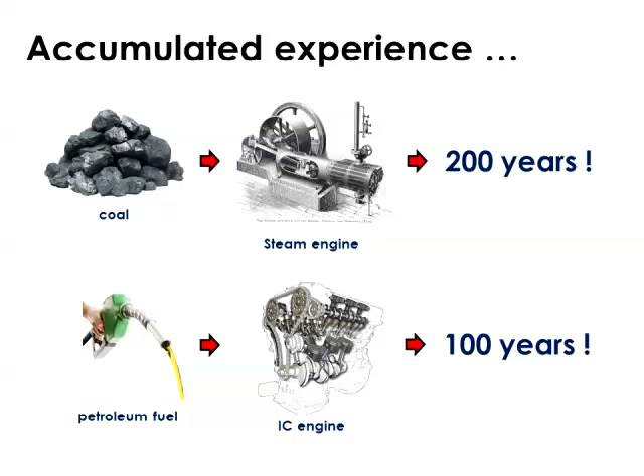So renewable energies have to get into this scenario. First of all, we can say that renewable energies compete with fossil energies. In addition to competing, biofuels also have to comply with engine specifications developed for petroleum fuels applications. When we were developing the engine and the fuel that goes with this engine, both were developed together.

Biofuels have to comply with this. You cannot develop a new type of engine which would be very efficient with this biofuel, bioethanol, for instance. So that's another problem regarding the introduction of bioenergies and in particular biofuels into this scenario.

And of course, when we're talking about bioenergy, biorefining is a key technology. By biorefining I mean the transformation of biomass into biochemical compounds, just as in a petroleum refinery, but also the transformation of this biomass into energy vectors, for instance electricity or biofuel, and also supercritical CO2.

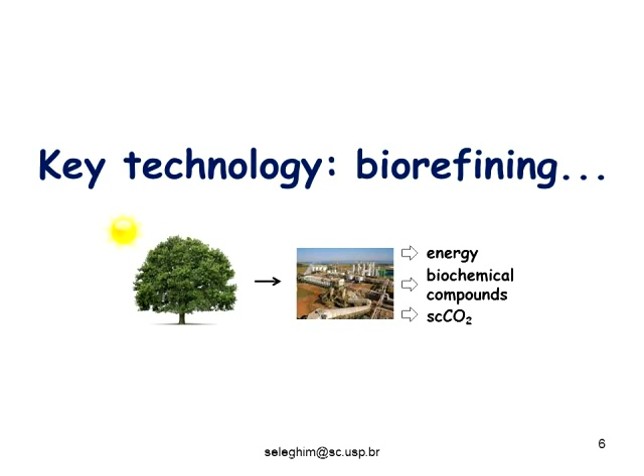That's an idea that I'm just stating. This may become very important in the near future because of carbon capture and storage. Okay, so let's move on.

The basic objective of this work is to investigate and to quantify the impact of integrating new biomass deconstruction technologies into an existing agro-industrial production system in terms of its robustness and new multi-objective optimal operating conditions. So we want to investigate the impacts and how this new integrated system can be optimized and can be operated in a very robust way.

I'm going to define these ideas very precisely during the presentation.

To start this work, we start by defining what we call a reference agro-industrial system. This system is composed of three parts: you have your industrial unit, and you have all the field operations, harvesting and transportation of the biomass to the central unit, central industrial unit. So it's a production, logistics, processing problem.

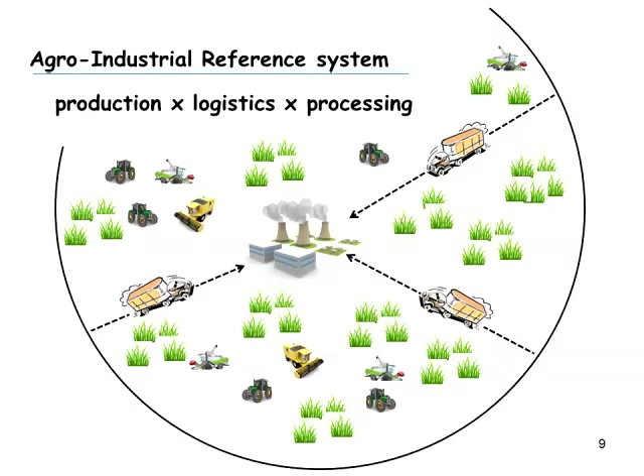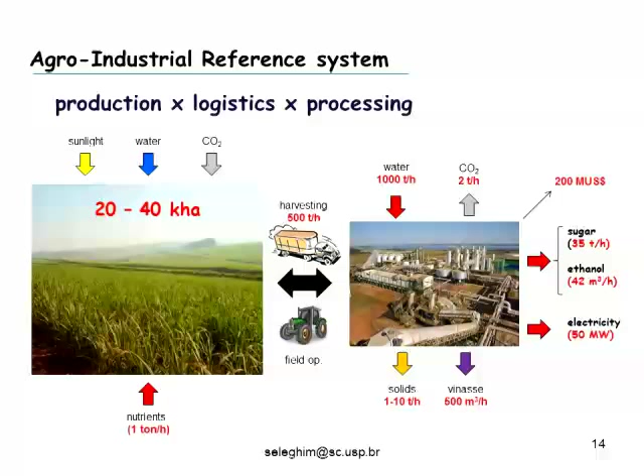Okay, so the problem now is to integrate second generation conversion pathways into these already existing first generation conversion technologies. How can we do that? There are several ways.

A very promising integrating strategy can be summarized in this picture. You see that the idea is to harvest everything together. If you're talking about corn, you harvest corn and also the leaves. You bring all that to your unit, and you perform several mechanical operations aimed to separate, to prepare, and to eventually extract compounds or molecules.

That you can process through a first generation conversion pathway, second generation conversion pathway, or use a thermochemical conversion pathway. I mean, you can burn things to generate heat. The first generation pathway can produce fuel and chemicals. The second generation pathway also gives you fuel and chemicals.

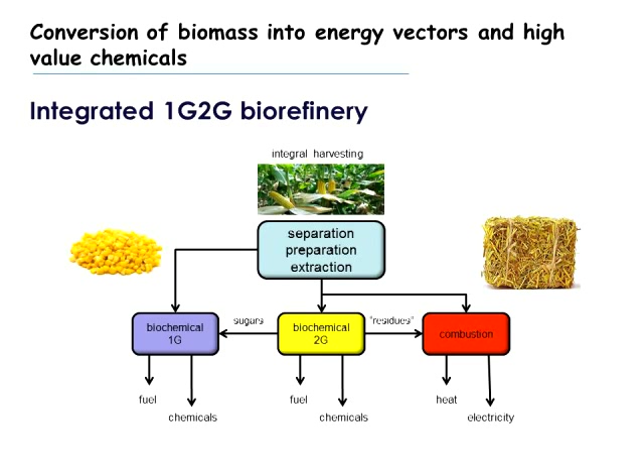And the objective of these processes here is that we ferment, we call the rest residues, you burn them for heat and electricity. So that's an idea of how this could be done, integrating first and second generation together. And you also have one degree of freedom here, which corresponds to deciding the amount to be burned.

Okay, so just to detail a little bit more, this is what happens in a first generation typical sugar mill. You have sugar cane being delivered at the plant, the industrial facility. You have mechanical processing. You separate this to extract those molecules.

That you can send to the first generation conversion pathway, I mean sucrose in the case of sugarcane. And what you cannot, we call bagasse.

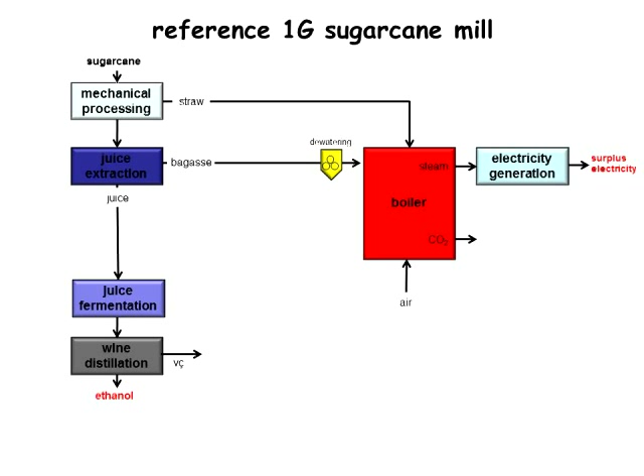Bagasse that we're going to burn has a humidity rate of around 50%. So you produce steam, CO2, and water. This is the conversion pathway for bagasse and straw being burned.

It's dismantled, then you have to depolymerize these large molecules made of glucose monomers, for instance. With those sugars, you can do a little bit more - you can send some of these fermentable sugars or their byproducts to what we call a biorefinery.

And you can produce biochemicals in this enhanced second generation industrial process. That's what I was talking about - going back one slide, you see with this strategy we are producing ethanol, electricity, and chemicals. I forgot to draw the arrow here for chemicals, so you draw the money symbol.

That's an important point. But I want to draw your attention that we're emitting a lot of CO2 here. This CO2 generates revenue, I mean carbon credits.

If you employ another type of technology instead of using air - I think in the near future this is going to be a very important idea, because fossil fuels are coming back very strong, especially because of new sources that weren't known before but are now viable due to new technologies. I'm talking about shale oil and gas.

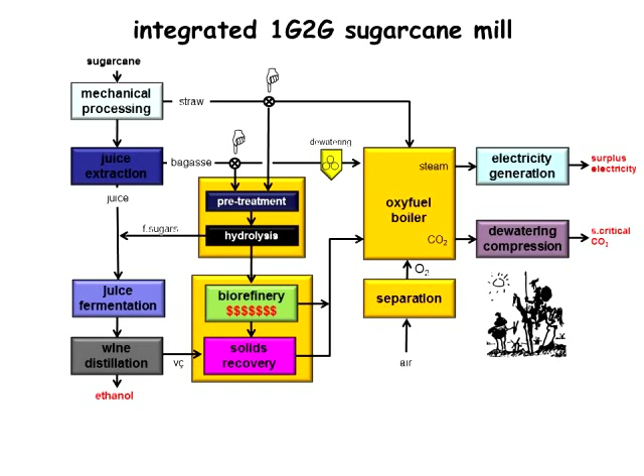So let's move on because I don't have all that time. Now I'm talking about modeling. We have this reference sugarcane unit. We already defined the scales that we have to work around, and now I have to describe how we're going to model this process.

The inputs, we can think of two types: process variables and control variables. Process variables can be fiber content of biomass, humidity, ambient temperature, for instance - these are variables that I cannot control. On the other hand, control variables are exactly those variables that I can or want to control. For instance, the combustion temperature in the boiler - I can control that.

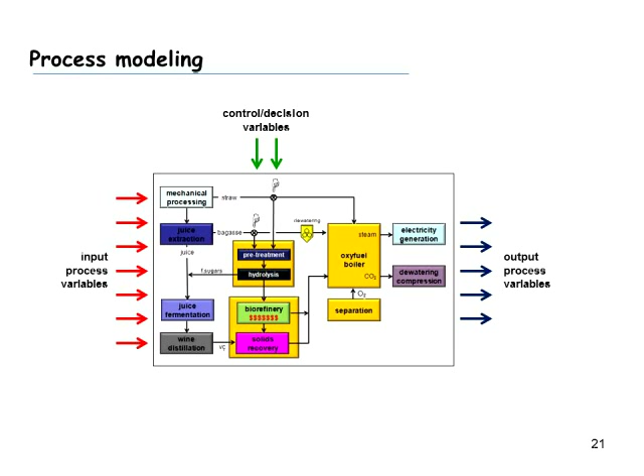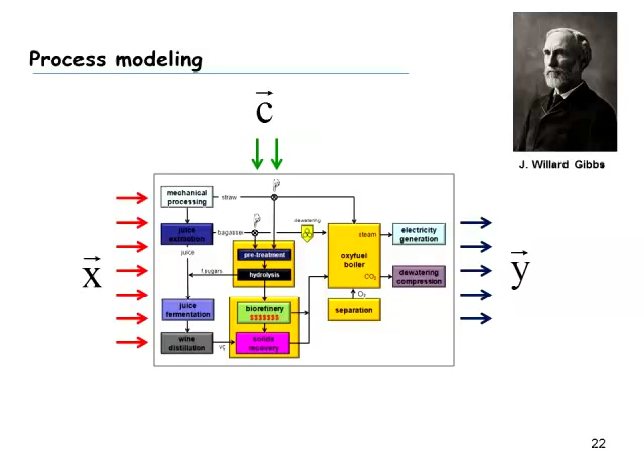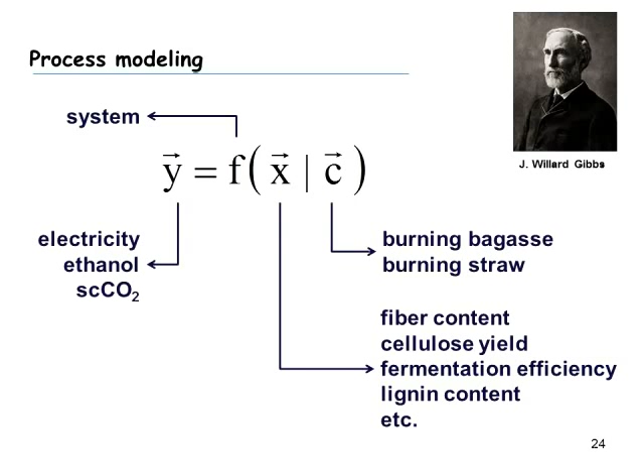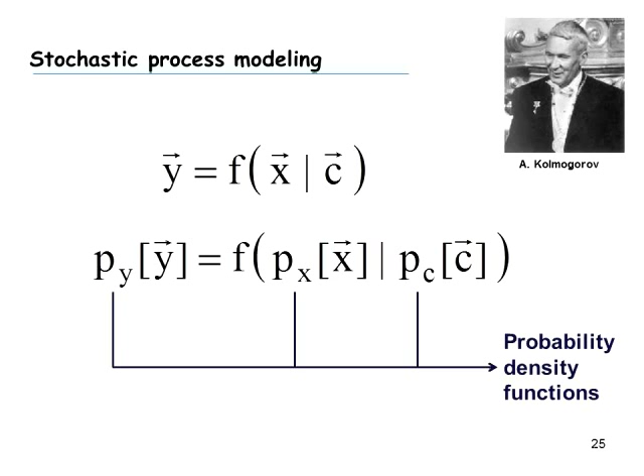It's our input vector here, 14 input variables, and so on. Our control variables - in this first study we're considering that all straw, 100% of straw, is burned. So we're going to control the amount of burning bagasse and the amount of hydrolyzed bagasse, and we have a second control variable, the input biomass, which represents the average sugarcane mill.

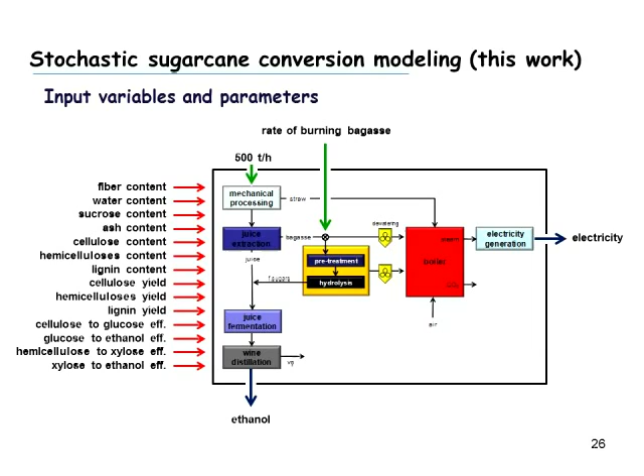So that's our system - this is what we're doing. We're working in terms of probability density functions, these variables that are shown. Let's see the results. First of all, let's see how things are being varied.

First generation ethanol comes from juice, which is converted 100% through the first generation pathway. The amount of electricity generated from burning straw is also fixed, because we're not deciding whether to hydrolyze it or not. So these two parameters are actually baselines of our production outputs.

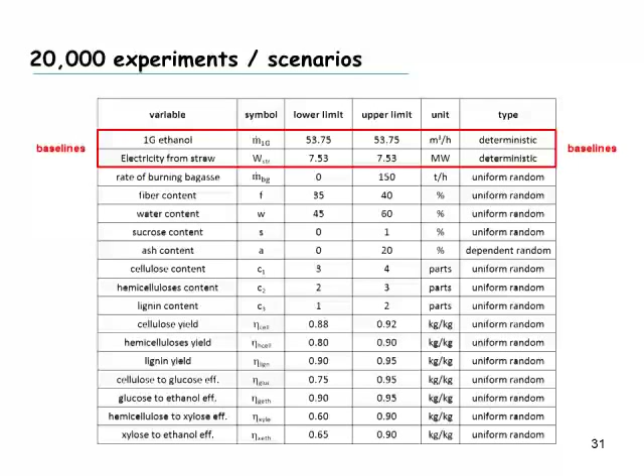I'm going to show you this in a few seconds in a graph. The other variables are being varied: rate of burning bagasse, fiber content, water content, and so on. In this table you have the lower and upper limits, and the nature of these variables. Let's look, for instance, at fiber content.

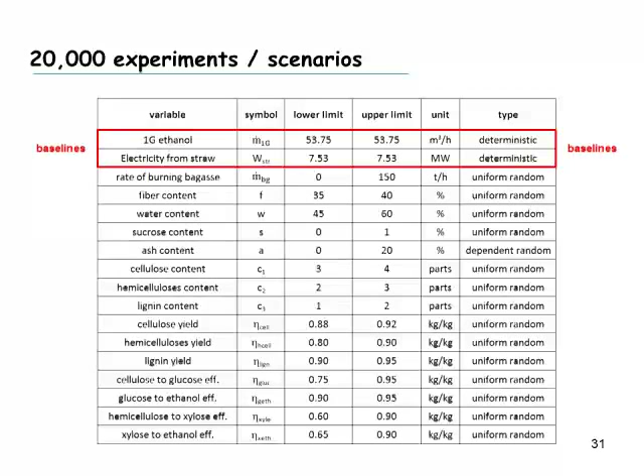Fiber content varies between 35% and 40%, and it's considered to be uniform random. Why random? Because we cannot control it. But why uniform? We are considering a uniform variation of the fiber content because I cannot control it, so a uniform variation is the worst thing that can happen regarding the conversion process, since the fiber content varies randomly, uniformly between 35 and 40%. This is a kind of worst case scenario.

Yeah, that's it, let's move on. Just to show you, I need to explain how the results can be plotted into what we call an operating envelope. An operating envelope is a graph in which you have all your output variables defined, such as ethanol production baseline - that's the minimum amount of ethanol that I'm producing.

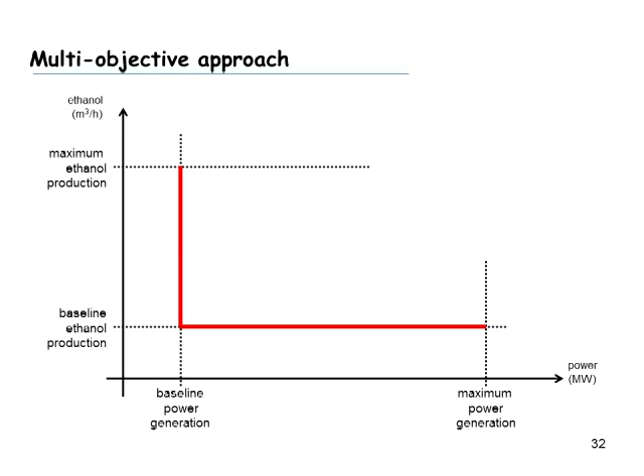This is associated with fermentation of sucrose, which is not varying. Also, you have a minimum electricity production, or baseline power generation, associated with burning straw - the decision of burning 100% of straw. Now you have another curve here, which we call the Pareto frontier, but it's actually an energy conservation limit, because those two variables, electricity and ethanol, are energy variables, and they cannot exceed the amount of energy entering the system. So you have a limit to the right of these baselines.

Somewhere you're going to have an energy limit which is associated with the Pareto frontier. Pareto was an economist, but his ideas are very useful in terms of how to interpret these results.

Another point is that these curves are the baselines in the Pareto frontier. A single set of inputs will produce a single set of outputs, which can be represented as a point in this graph.

Also important, that's the operating envelope. And another important feature to understand the results is what we call the target operating region.

The Pareto frontier actually represents the maximum amount of output variables that you can get. It's constituted of points we call non-dominant points, meaning you cannot increase power generation without decreasing ethanol production. That happens only on the Pareto frontier—those are what we call non-dominant points.

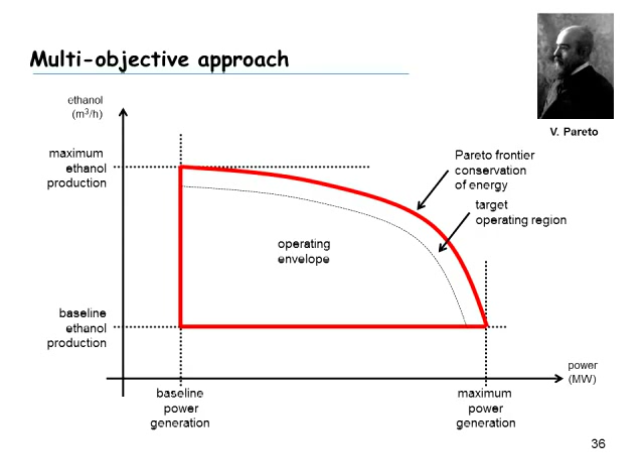From the process point of view, if we manage to operate near the Pareto frontier, this is very nice because this is the optimum operation state regarding this two-objective optimization problem. So let's move on.

Those are the results that we got. So what we did, we wrote all those equations, varied all those input variables, and made 20,000 numerical experiments. Each point is a set of input variables, and we can use formulas for this. First of all,

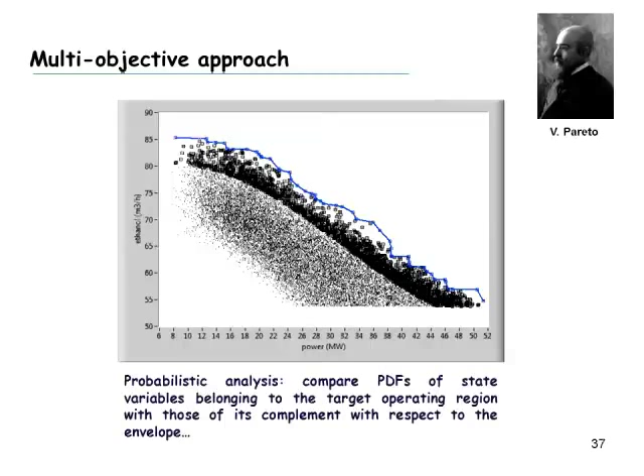let's identify the things I was talking about. This is identified with respect to belonging or not to the target operating region, despite random variations of fiber content, bagasse, humidity, and so on. So if you manage to set your control variables so that you get PDFs which are insensitive, you have a very robust process—because no matter the fiber content, the probability of being near the Pareto frontier is the same.

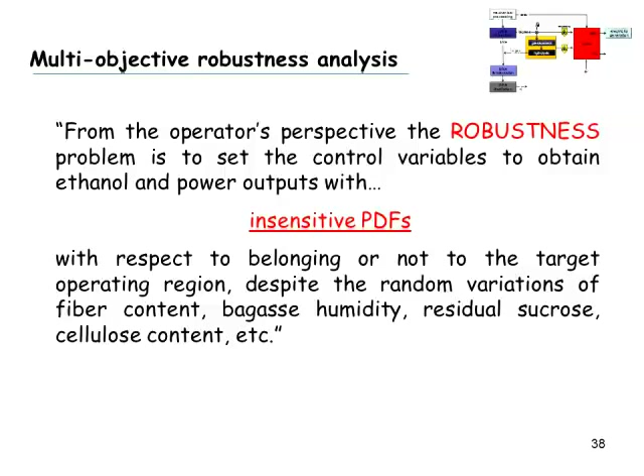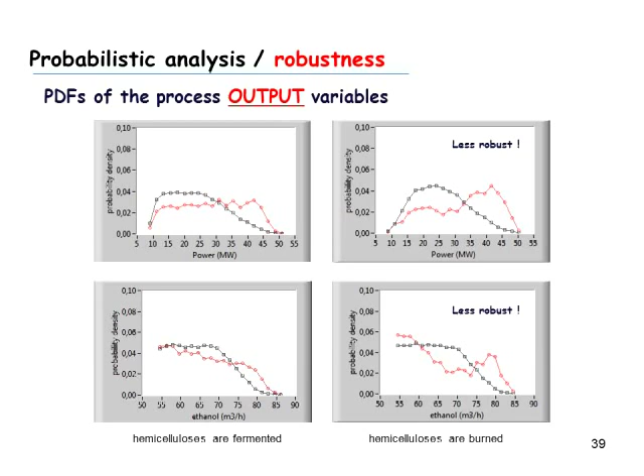So let's see the results. To analyze that, we look at the output PDFs, so ethanol, electricity, and operation. This pathway, which corresponds to burning hemicelluloses, involves an optimization problem: set the control variables to obtain increased probabilities of getting operating states within the target operating region, where you have maximum conversion efficiencies because you're near the Pareto frontier—near the energy limit line. You obtain these maximum efficiencies despite random variations of all intervening variables like fiber content, humidity, and so on.

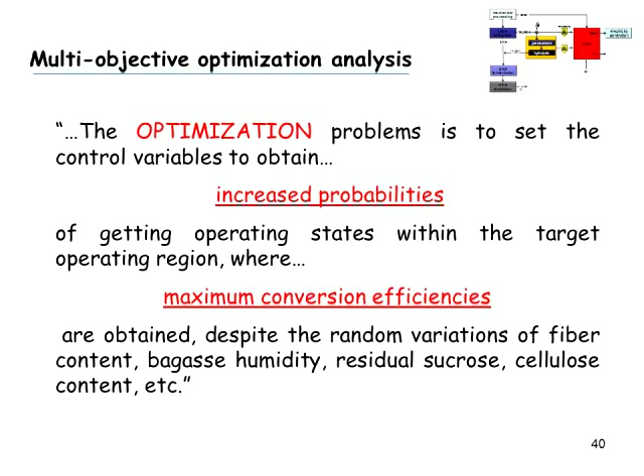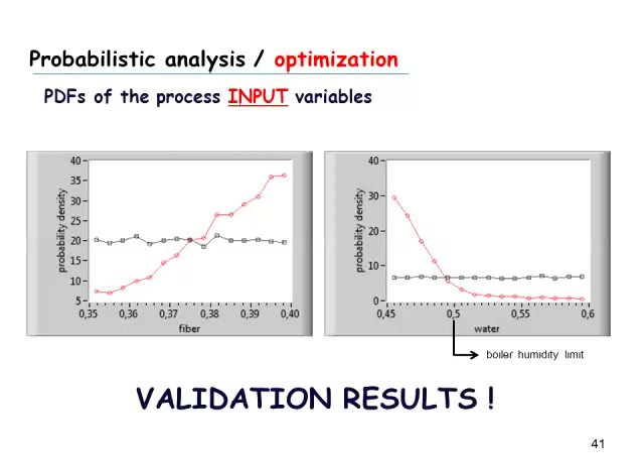Quantitatively we also know that 50% water content is a well-known number in the field, from about 30 years of experience—the constituents of fiber: hemicellulose content, cellulose content, and lignin content. So you have the PDFs: the operating envelope and the target operating region.

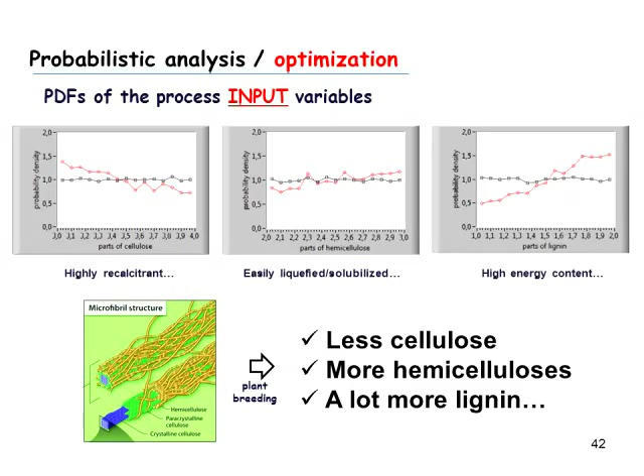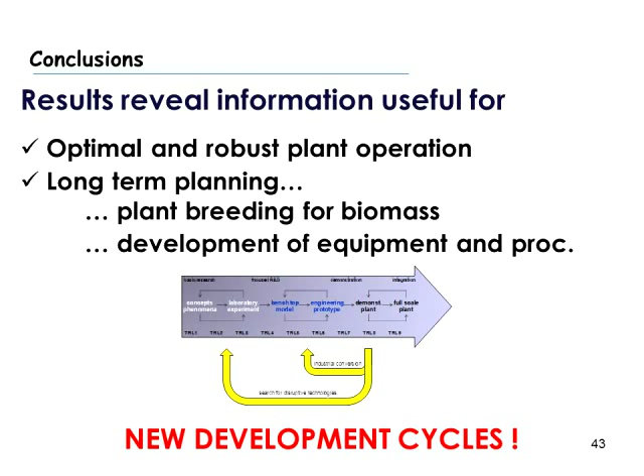In conclusion, these results reveal very useful information for optimal and robust plant operation—the decisions operators must make to increase the chances of being optimal. These insights are also important for long-term planning regarding plant breeding for biomass, and for developing new equipment and processes, which leads us to conclude that there will be a new development cycle regarding all these technologies. Thank you very much.